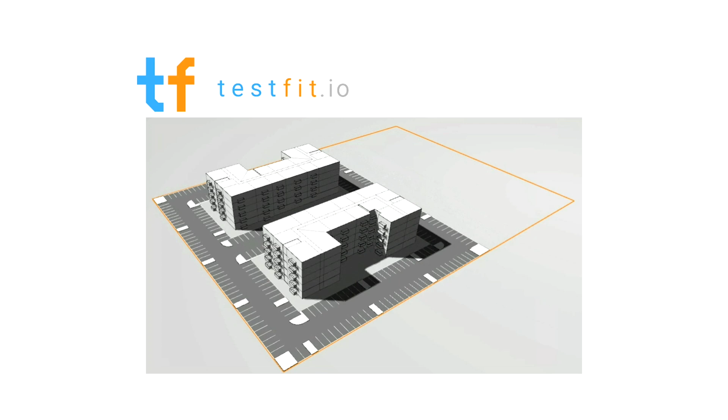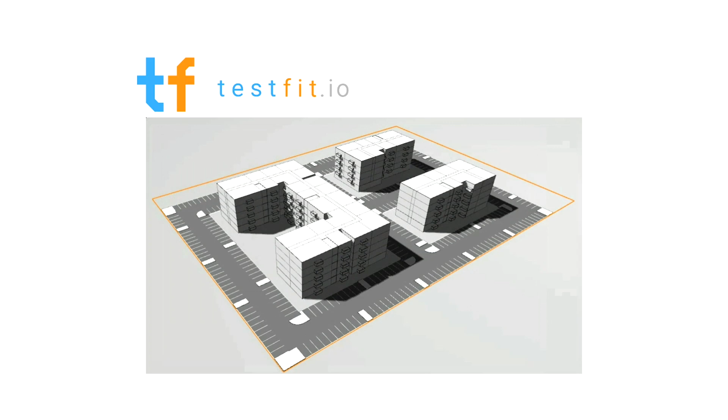Let's say you have a site and you want to say, hey, I want to have 235 units on that site, and it's a multifamily unit, and I want to go through different configurations and figure out how much will fit on the site, based upon the parametrics design. So what this does is allows you to parametrically test fit a site to see what you can fit on that site in these different options.

Normally a designer would do this and submit those to a developer. Now a developer can do this, or a designer can use this tool to do the test fit.

Tim is going to run a short video here, and he recommended that I don't use the audio, but I like the audio. So let's see if we can hear it, if this comes on. It may or may not be working. Well, certainly I think he muted the audio.

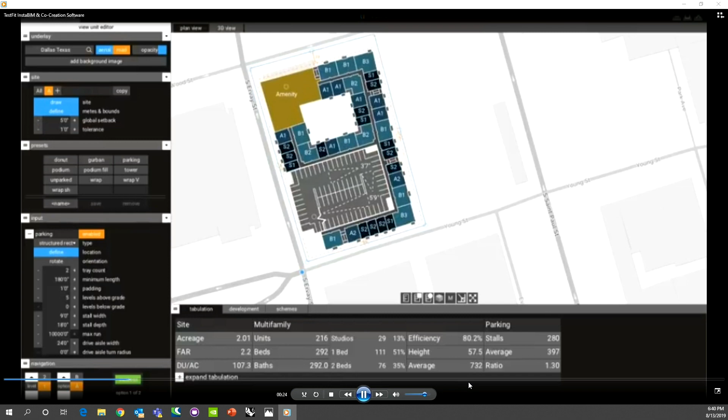It's very hard to see what's going on here, but if you go to the website and take a look at what's happening, there's parameters on the side, and then there's feedback down here on what it's measuring. It actually gives you quantity counts for how much space is inside each one of the buildings, so that you can estimate how much this is going to cost and whether your schemes are going to work or not.

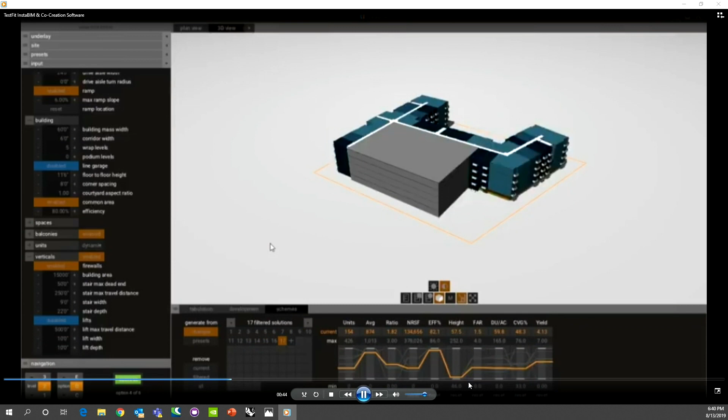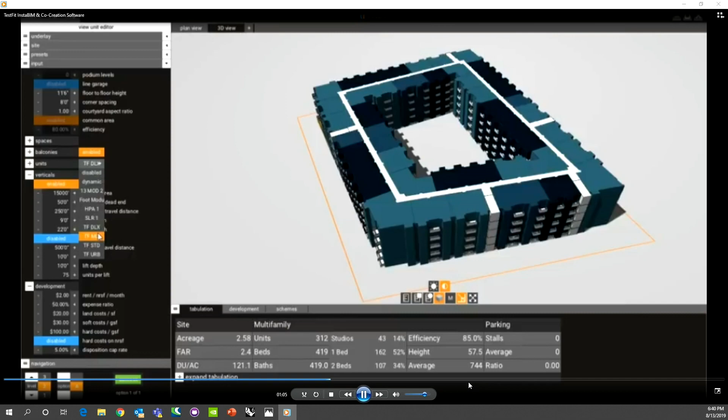This is real time, not sped up. This is kind of how it works when you go use the site. If anybody is dealing with developers that are trying to test fit sites, this is a way to do it. This is moving really fast. The audio would tell you what is going on here, but the audio is not working right now.

I just want you all to know that if you want to see a Forge application, go to TestFit.io, go to their website. You can schedule a demo or look at what they're doing here. And this is for real.

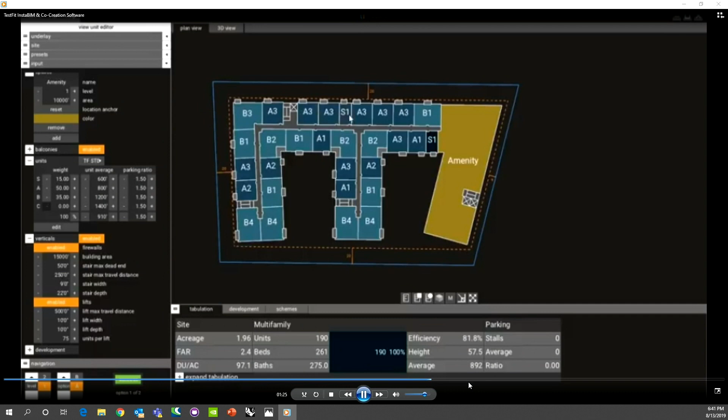This is generative design, because it generates many, many different options for you. It'll generate 1,000 options if you want, but nobody wants to go through 1,000 options. You only want the top 3, and this is what this allows you to do, is get down to the top 3 really, really quickly.

And guess what? At the end, once you're done dealing in this Forge environment of test fitting your building, then you can output this to AutoCAD, to Revit, to SketchUp, or whatever program you want.

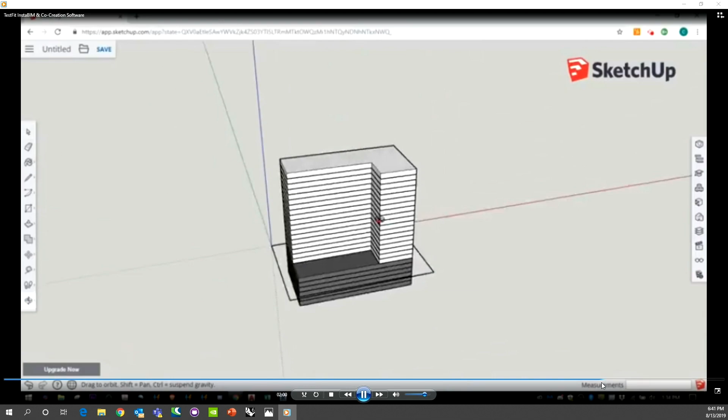The second big takeaway that I had from the conference was there was a presentation done by Turner Construction. A guy named Derek Zero and a bunch of his teammates put together a presentation where they were showing how they were using virtual reality, and they posed a couple scenarios.

What they did was they took the building model, they modeled it up, but they didn't model it down to a specific level of detail. They modeled the level of detail about how the people installing it in the field would want to see it. So they stripped out all the stuff and made it very visual, so that people, before they ever went on site, before they ever started the project, could walk through it.

They actually did this, put these glasses on. These are people that were installers and mechanics that were really interested in what was in the virtual reality of the site.

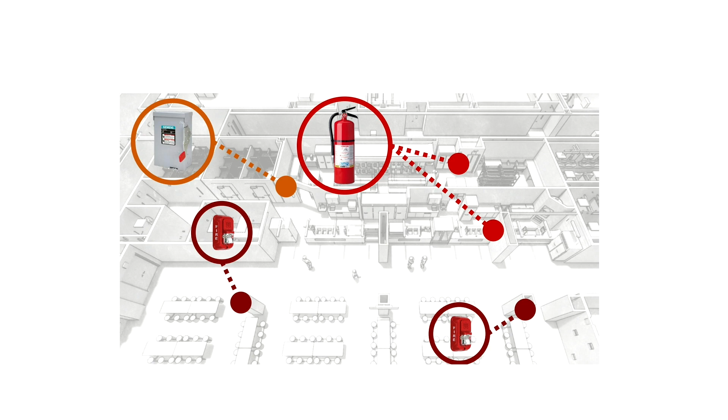More so, what they did was they took this to the permitting authorities. They said, hey, the building's not built yet, but can you, the plumbing inspector or the electrical inspector, please walk through the model with us so that we make sure we get it right before we ever start building, collapsing the time before the building gets its certificate of occupancy.

I don't have great images here because I tried to download them and they didn't turn out well, but it was a very good use of virtual reality to help speed up the project. So anyway, that's a little bit about CAD Microsystems and our user groups and what happened at BILT.

And Timon, why don't you take it from here?

Thank you, Jeff. All right, so Jeff already stole one of my big thunder shots, and that was the TestFit.io thing. But one of the things I wanted to say is I'd seen generative design before at conferences, more as a buzzword, more as things that were happening, going to happen in the future.

Now, it's not here today to take over everything, but I will say that it's part of what I'm calling augmented design. I think we currently live in an era, a coming era of augmented design where we are using virtual reality, where we're using generative design to help us assist. And those of us that will adapt to this augmented design, where the machine is doing some of the design and the human is doing other parts, are really going to be able to take advantage of things.

So I'm going to talk about 4 different areas of the conference. First, I'll talk a little bit about the hackathon and what that is. I'll talk about owners' expectations, really short. We'll talk about working with data, and then machine learning. I'm going to skip the part about generative design.

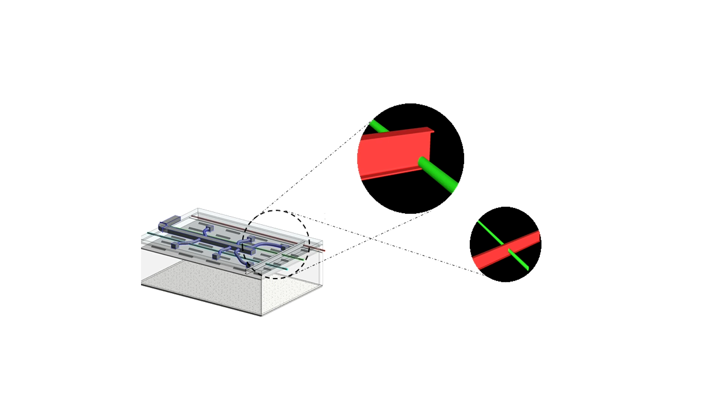What do you do with a clash after Navisworks has already been run and you want to process the clash further? And our result out of the hackathon together, again, these are kind of 2 project manager people and 3 people who did the coding, all working together to come up with this in 2 days, was we created a web application.

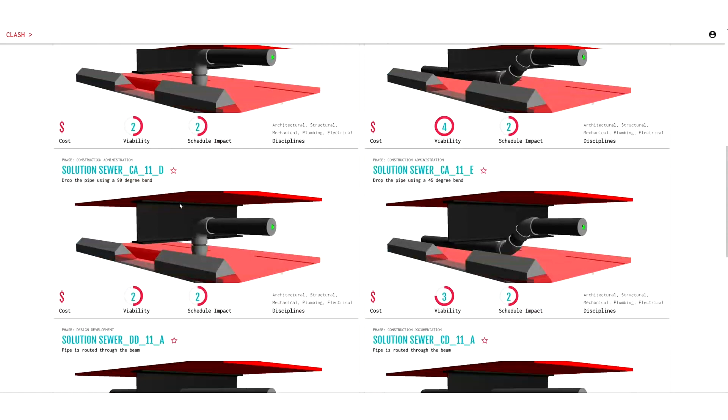Again, this is just kind of a prototype, so it's not really released out completely, but a web application where the people who are going to make the decision about who's going to solve this clash, they can decide the clash, they can pick the solution. So they might say, for example, it's most expensive to cut through the beam.

Surprise, surprise. It's less expensive to reroute the plumbing. But maybe at a different phase, it might be different, or maybe if it's a different type of duct or something, then routing it through the beam might be more helpful.

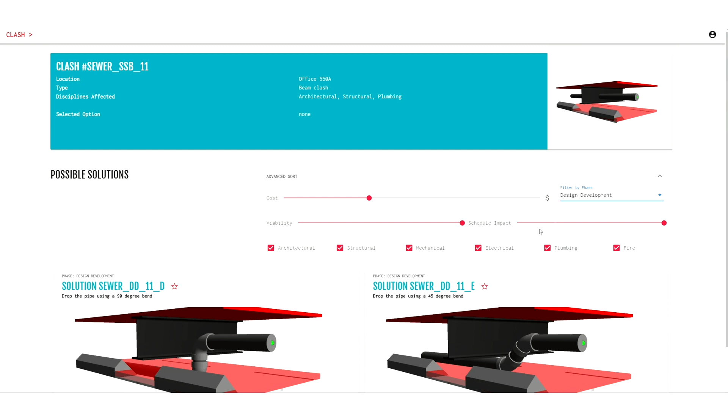So during the clash detection or post-clash detection conversation, they would select the optimal solution in the web app, because they're not usually going to be working in Revit. And then back home, the people who are receiving the data, so for example, an MEP consultant would just receive the clashes that had been decided are going to be solved by MEP. The structural engineer would only receive the clashes that were decided would be solved by the structural engineer.

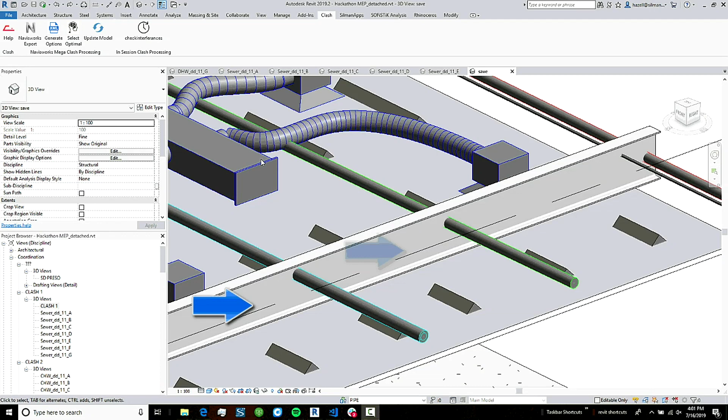And then we kind of put together an update model, and it would update the model in the way that the clash was decided by the project managers were going to be solved. So kind of a prototype, but what I learned through this exercise was that this idea of augmented design, or we actually use some generative design ideas about how to route the pipes, it's really here, and there are real applications that can be applied.

So going on from the hackathon, I went to a few presentations from owners. One was during Data Day, and one was during the main presentation. And both of them really said, we want data. We want good data, but they wanted it in different ways. So the one presentation was by Alberta Infrastructure, the entity that runs all of the government infrastructure inside Alberta, Canada.

And they have a great BIM deliverables document. Highly recommend writing it down right now, going and checking out Alberta's BIM deliverables document, because they went 4 years ago from having one line, do BIM, to actually having, I think they have 20 pages of what they expect when you're doing BIM on their projects.

I might have some recommendations for them for how they can adjust it, and they're working on it, but that was really interesting. And they said, you know, if I give my operations guys a model, they are like, what am I supposed to do with it? But if I give them a COBie document, they're like, oh, that's amazing. That has all the information I need, and they wanted a spreadsheet.

So it was interesting to hear them say that. There was another group, Willow, that is currently working on digital twins. Digital twins is this idea that there's a virtual representation of something real, and in this case, a virtual representation of the building.

They were using BIM 360, so for those of us working in BIM 360, they were pulling your models directly out of there, then putting usage data on top of that, so the owner could review the models, their buildings, and connect all of their buildings together in one model. It was really interesting to see the two different ways owners are looking at it.

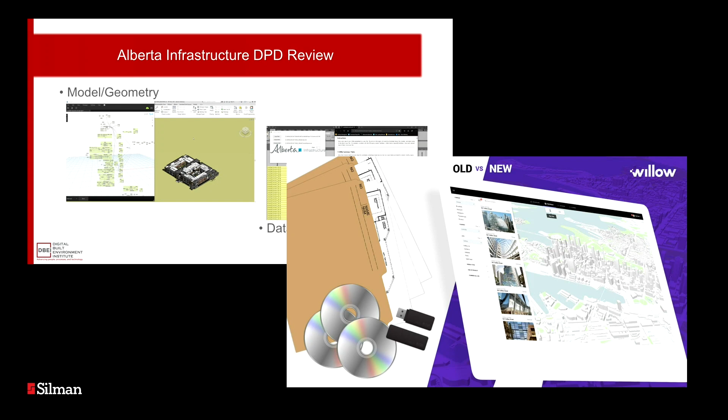But at the core of it, they're looking for data. Really, our models are data. They have a geometric representation, but really, that's what they are. Heard a lot about data extraction.

Everyone's using dashboards, dashboards for this, dashboards for that. You don't have to go and create your own dashboards, there are a lot of entities out there. But when we're working with so much data, we have to create a human-readable way to look at that.

I think Richard has an example of that, where he's looking at journal files, which are huge in mass, but he has a visual way for a human to understand what they're looking at. Same here with model health, whether it's the BIM maturity of a project or a project team, all kinds of different things. Geometry and data transfer has been something at these conferences for years.

A few years ago, Flux was a big buzzword. The one I saw at this conference was Speckle. It's interesting - Speckle has the ability to not send the entire model to the rest of the players in the team, but just send some key control points.

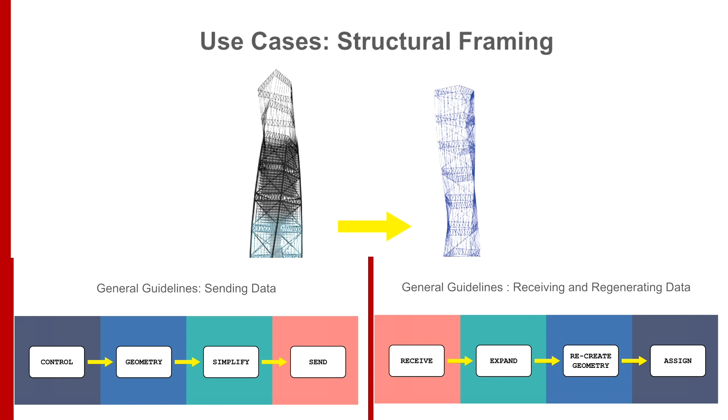For example, if I'm the structural engineer developing the exterior facade, I really may only need the exterior mass of the building. I might not need all the components, but information about some of the structure, some of the floor plates - just key control points that can be exported and downloaded on the other end and processed the way they're going to use it. Not sending a full model, but just the parts that are pertinent to different entities. I thought that was interesting.

It works with all kinds of applications. But wait, Rhino - am I allowed to say Rhino at this user group? Rhino has just redeveloped their entire application to work on top of Revit. So you can now open Rhino on top of Revit, and all of the Grasshopper stuff works on top of Revit. It's in beta, but I believe in the next year or so they'll release the next version.

The last part I'm going to talk about is buzzwords or reality. The two words I was picking up on - one we already talked about, generative design, and the second is machine learning. I went into this conference with a very specific view of machine learning, but realized our industry currently is using it in slightly different ways, and there is machine learning happening today.

There were two examples shown to us. How good is my model? For machine learning you need a large data set. There were a lot of presentations with small data sets, like 8 models, 10 models. So it's doable, but your results are going to be kind of iffy if you use a small data set.

So, how good is my model? I might plug in how many groups I have. I might say how many in-place families I have. I might say how big the model is. And then from that information, if I had 30 models like that, and I knew these ones were good...

...and these ones were bad, then when you plugged a new model into it with those same key data points, it could tell you, yeah, it's good, or no, it's bad. You could get more specific into that. But that would be an application.

Or how much does this cost? Sometimes it takes a lot of time for us to figure out costs of our projects. So this group developed a machine learning algorithm that would look at how much curvature the pieces had, how much uniqueness there was in their design, and then would spit out an approximation of cost.

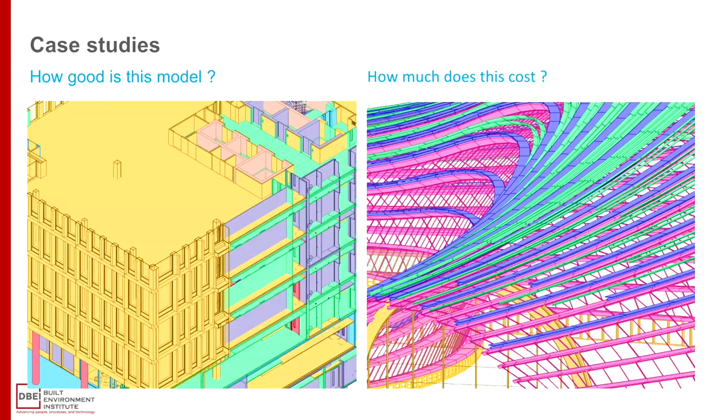So then the designer, when they start putting in these crazy swoops, realizes, oh my goodness, I just tripled my cost with that one swoop. If I remove that one, it might be more feasible and might not get value-engineered out later on.

Other applications are things like clustering. So if you're looking at this facade, or this facade here, and you're trying to figure out, okay, which of these pieces have the most curvature? Now, I'm not telling you here which ones have the most curvature, I'm not telling you which ones are the most square, but it's grouping them based on the features that they put into it.

So kind of like, is this a cat, is this a dog? It's not telling you, yes, these are the expensive ones, these are the cheap ones, but it is kind of telling you there's two groups. And then you could boil down into those two groups to figure out what they are. You could tell it how many groups you had, and it would give you a different layout.

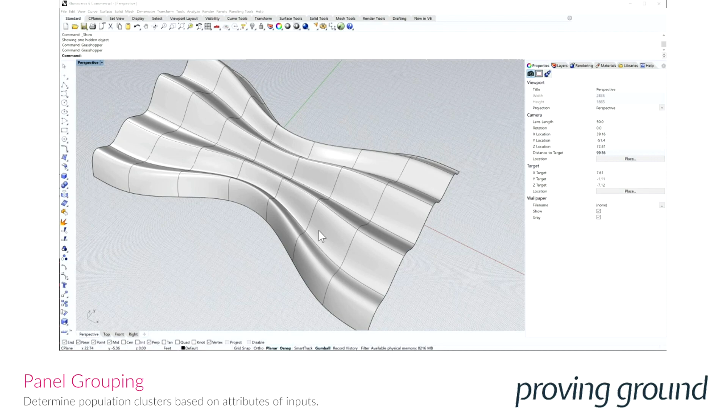Now, how many of us have projects that are 90% swoopy, curvy things? Nah, not so much. So it's like, wait a minute, Timon, you're telling me machine learning has application, but only for these kinds of things? Well, I want to pose that any of us that work on historic buildings work with swoopy facades.

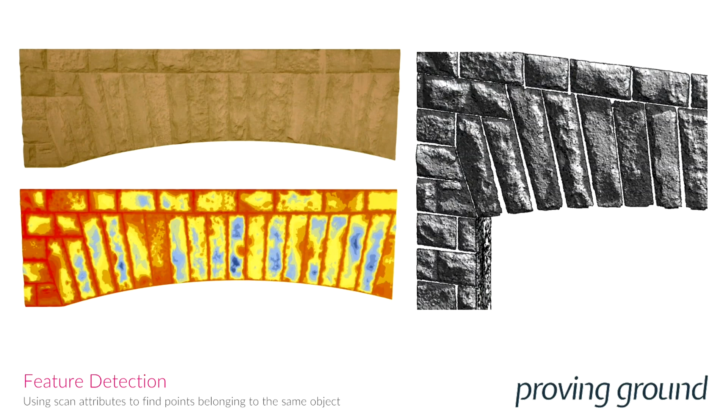That's pretty cool. So with that, I want to show a very, very mini version of another kind of machine learning thing that I learned.

Was it on a moment ago? As soon as I sat down? Anything? Well, there's beautiful squares on the screen. Are we going to get this working? I'm plugged in still.

All right, well, while that pulls up, let's play this one. Oh my goodness, this is going to be... let's see here, I need to change this. Can I do this?

Yes, great. Okay, so... ooh, it's kind of small. So here, do you see? You can't see it, so you're going to have to trust me. If you want to stand up and walk up here, you can see it. But I have these 4 or 5 different types of rooms I've laid out here.

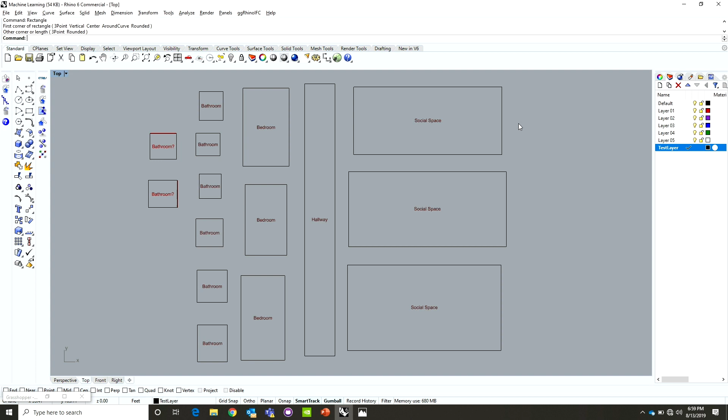And it says bathroom. It's like so much less impressive. Was this zoomed out? Oh, you want me to draw a different one? Wait, are you thinking that I've just programmed it to always say bathroom? Oh, that would be pretty smart.

All right, so let's try a big one here. So I'm going to draw a big one over here, and it says social space.

So there's just a very, very tiny, miniature example of how machine learning could help us if, for example, from our last 80 projects, we were to take every room, take the volume, take the dimensions of the sides, maybe take its level or its location, any other features we think are important to know. Maybe is there a toilet inside of it? That could be helpful for naming. And then let the computer name it based on how you've named that type of space in the last 80 projects. So that would be kind of a miniature applicable application of machine learning.

So with that, I'm going to end and open it up for questions if anyone has any. And I'm not going to try to pull up the question slide. Well, we'll try. But all right, we'll just leave it on this. So any questions? Yes?

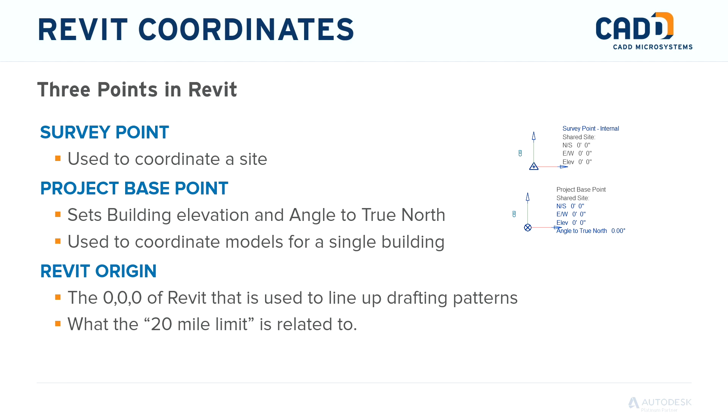The Revit origin is the 0,0,0 point for your graphics in Revit. So the reason why, when you model something really far away from the Revit origin, the graphics start doing weird things is because it's just too far and it can't process it.

So the most important thing is to make sure that whatever you're modeling is near the Revit origin. When you start a Revit model from the out-of-the-box library template, the 3 points are right on top of each other, so that way you know where they are. If you ever lose your Revit origin, not sure where it is, and you've moved your other points - if you link in a CAD file origin to origin, it will put that CAD file at your Revit origin.

So that's how you can find it and know where it is. So the real lesson here is if you ever get a file, like a civil file, and you link it in origin to origin and it shows up way out in space, don't model over there. It's not a good idea, because it's just going to be too far. And it's not even 20 miles.

I actually went down a rabbit hole once trying to figure out where the graphics do weird things. Literally 4 hours later, I still was like, this makes no sense at all. I wrote a blog post about it - you can go find it. But really, the lesson is just don't model all the way out there.

Model close to the Revit origin, because what happens is your drafting patterns start doing weird things. As you zoom in and out, lines will just kind of jump around because it can't process that far away from the Revit origin. And it's really only like a mile or two - it's not even 20, just based off of my own personal testing.

So all of that's there. Initially, when you set up your model, typically the architect owns the points. I typically, in all of the templates that I set up, will actually place 3 reference planes to mark the X, Y, and Z of the Revit origin.

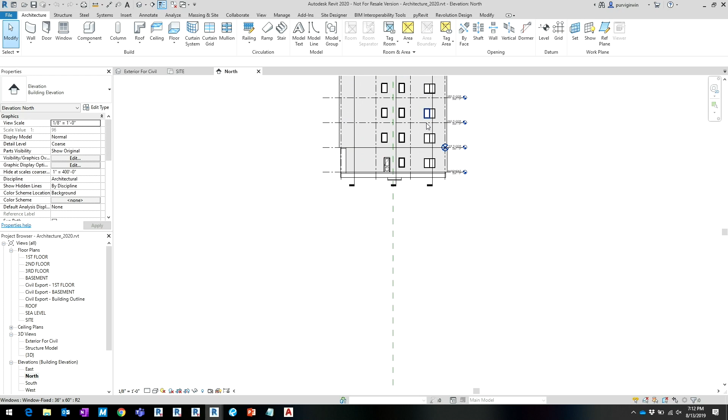Okay, so here I have a file, this is a little building. If I go here to my north elevation, you're going to see that my first floor is set here at 340 feet. What I'm showing here is that you're going to take a point on your building that you've gotten from your civil engineer, who has located the building relative to where it is on the planet.

Because that's always the issue that we have - in Revit, the world moves around our building. It's not really located where it is in the world, whereas civil engineers locate the building where it is on the planet, which is how it should be really. So what we're going to do is take a coordinate point given to us by our civil engineer of a specific point of our building, and use that to orient our building.

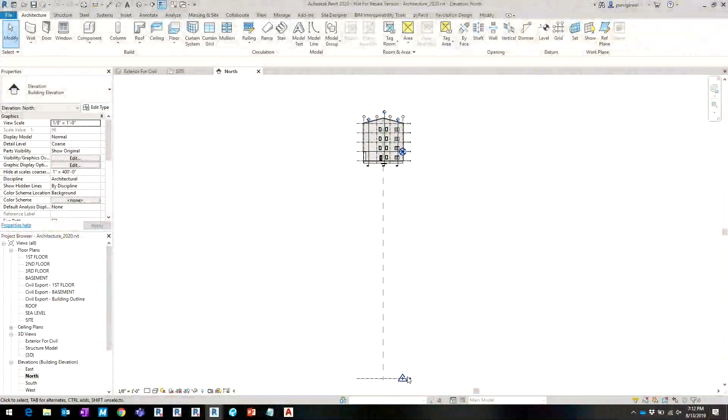So in order to help us do that, our building is up here, and I have a sea level elevation marked as my 0,0. We need this 0 level for topography, right? We know that topo always comes in relative to the 0 of your building. So part of this is going to show you how to bring in topo also. So we have this 0 level to be the 0 of our building, and here I have the building located here.

All right, so I'm going to go to my plan, my site plan view. I have a text file. This was given to me by my civil engineer, giving me the northing and easting for my building, along with the elevation that my project base point is going to be set at, and then my angle to true north. So I'm going to take these values and put them into Revit.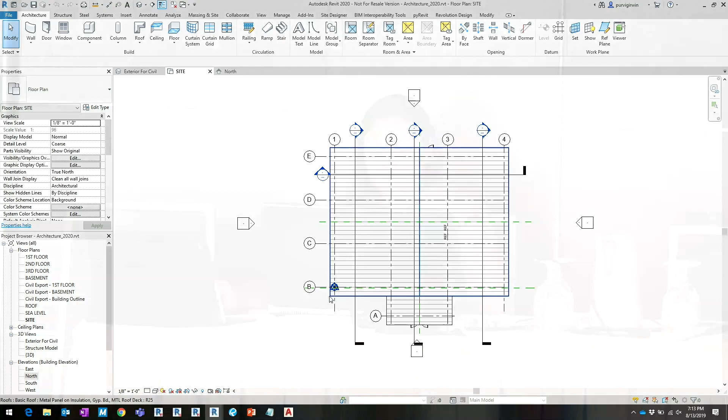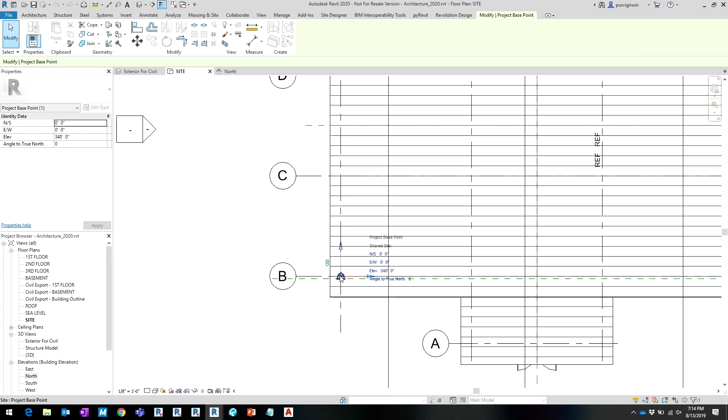So I'm going to copy this. Now something important to note is here I have my project base point and my survey point, and they're on top of each other. My survey point is set at 0,0,0. My project base point is set to 0,0, with an elevation of 340. This was to mimic a real world example where the architect may have already given the building an elevation, and now the civil engineer says, actually it's a little different, so now we're going to update that.

And this is a different workflow than anything I've used in the past, partly because being able to get this information is relatively new, so it's kind of an update to the workflow we've used before. So I'm going to go here to my Manage tab, go to Coordinates, and use the Specify Coordinates at Point.

Has anyone ever used this? A couple of people? All right, if I'm doing something wrong, you can tell me.

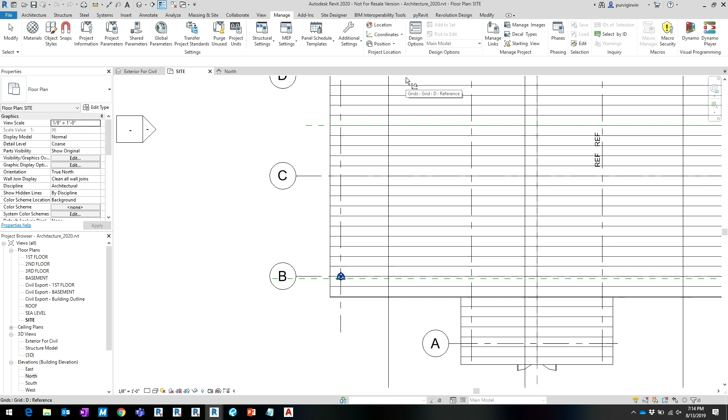Specify at point. All right, I picked it. I'm going to choose this point right here, and it gives me this window with those points. Okay, so I have that north-south one. I pasted that there. Go back here, copy that one, paste this one here. This is 344, and this is 249.

Now something interesting you'll notice here. I type in this 249, and then I click away. It changes it to 111, and it actually changes this to west. You actually have to go back here and change it to east. We're not sure why - it's not documented anywhere that we know of. Do you know why?

So I have the survey point unclipped right now, yes, I have it unclipped. So it's going to move with it. So I put that in, now. So when you type in the angle, it's going to switch to west, and you have to just switch it to east, otherwise it will rotate the wrong way. It's just a weird thing we figured out as we were putting this together.

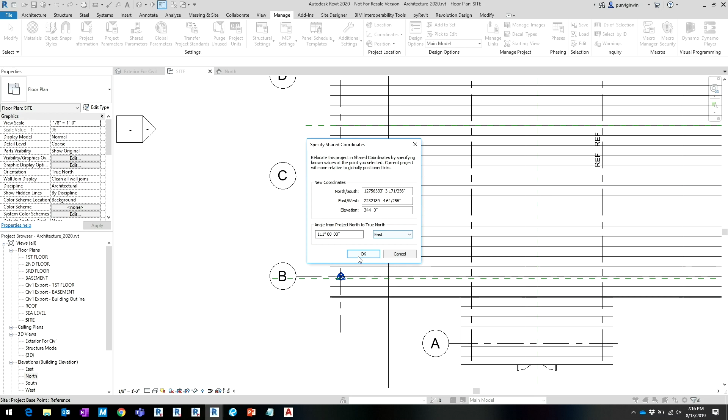There you go. Yeah, Nick figured this out, and he said he couldn't find it documented anywhere that you need to do that - just from testing it, he figured this out. So now I say OK, and it rotates my building. Cool. Okay, so now I've got my building.

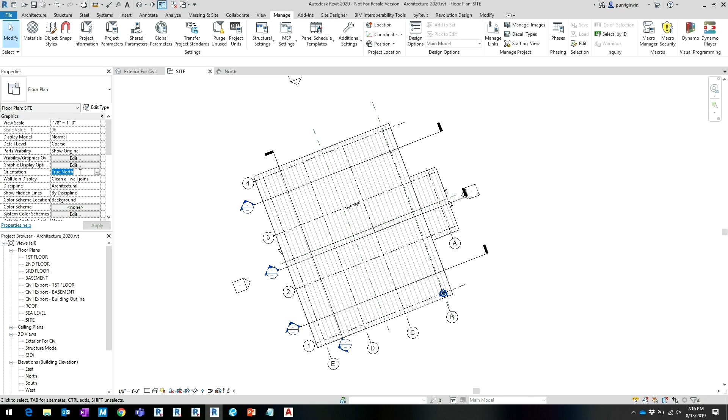It's actually set properly. One thing I forgot to note, my view is set to true north. You want to make sure that when you do this, your view is actually set to true north, because that's what you're doing - rotating the true north. So if I go here and change it to project north, I'm going to see that it rotates back to the way it was.

Okay, pretty cool. Now, we haven't yet figured out a way to consistently push this back to the links. So the recommendation I'm giving you right now, which may change, is to have all of your consultants do the same thing - specify the same coordinate, give them this coordinate, tell them to specify this at this point. Once they do that and you link them back in, they'll all be in the same spot.

The one other thing you'll have to do before you send it out, because we changed the elevation of the building, is go here to elevation - this actually got moved up 4 feet, the sea level. So we're going to change this back to 0, and change our survey point back to 0, and then clip it. Now our survey point elevation is at 0, and our sea level is at 0.

Okay, cool. How often would you say you get those points from your civil consultant? I would ask those out there, because I don't know. Did you have a question?

Yeah, I've been trying to make that work, and it wouldn't actually do it, because here's the issue. Typically, I've given my model to my consultants, they link it in, they acquire the coordinates from my model, and then they start working. So when you try to reacquire them, it tells you that it's already acquired, and it doesn't work. The solution would be to unlink it, to remove it and link it back, but that's not usually what we want to do, because a lot of times consultants are dimensioning off of the links.

Or somehow their objects are referenced to the links, so removing it and putting it back isn't always the best solution. I tried that too, and it didn't work. So it's still in testing - this is still in testing workflow in terms of using it in real life and not setting it up perfectly from the beginning. That's why I'm saying take all of this with a grain of salt, and the fact that coordinates are just confusing in general.

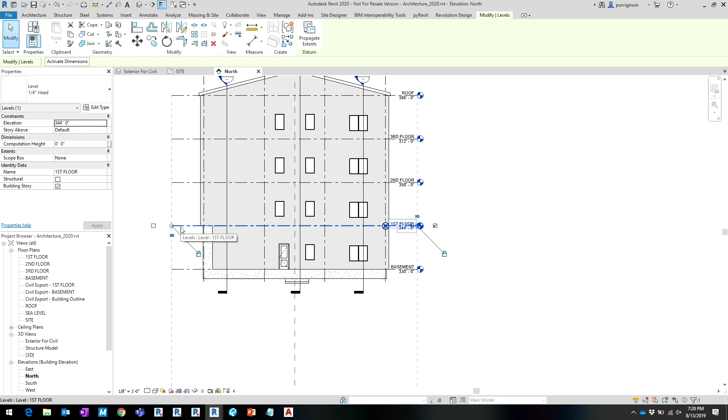You mean you wouldn't want to change, like move your whole building up that way - that would, like moving your model elements, that would be a nightmare. Yeah, no, I wouldn't move it. So really what you're doing is a similar thing to the relocate project tool, where we're keeping the building where it is and moving the world around it. That's how Revit works.

That's why all of your annotation doesn't get messed up when you use the relocate project tool or when you use this, because it's literally like moving the world around your building. Does that make sense? So all your sheets don't get messed up. I don't know what happened over there.

So when you did specify coordinates at the point, what did you select after you? I selected right on top of, it ends up selecting where the project base point essentially is. So you didn't specifically select the project base point? I'm just wondering what elevation, since you're picking a point. When you pick the point, it picks the project base point - like I picked it on top of the project base point, so that's what it picked, was the elevation of the project base point.

Do you have a question in the back? Yes, but if you have linked an architectural into, say, an MEP model, and you have copy monitored the levels, if the architect changes the levels, wouldn't you just do a coordination review and it would correct it? Change the levels? Yeah, you said you're moving your level, building up - wouldn't just doing a coordination review fix your model? I'm actually not sure if doing just a coordination review and then accepting the changes would actually fix it or not. That's a good question.

That's not something that I've tested with it.

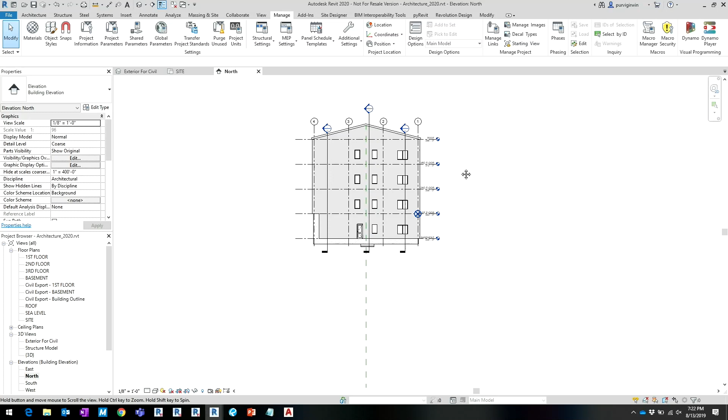I want to show you now that we've used that point to specify where the architecture model should be, we can actually link in the Civil 3D file. I'm going to go to Insert and Link CAD, and this is the site file. I'm going to uncheck the correct lines that are slightly off axis, just because it's a big site file and I don't want it to mess up my information. I'm choosing by shared coordinates, and orient to the view.

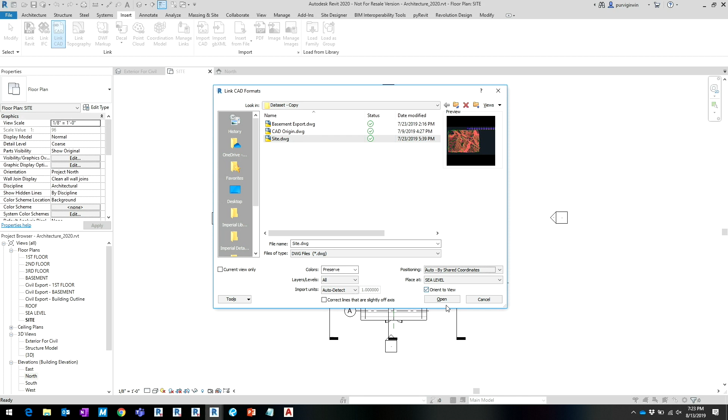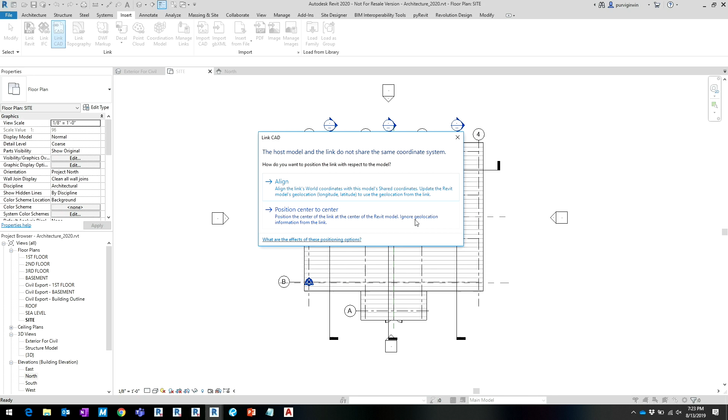This is a really big file, so you're going to get that typical 'it's too big' warning, and some ActiveX stuff. This is the interesting thing that happens: it tells you that your model and your CAD link don't have the same coordinate system, so what do you want to do? Usually it just tells you it can't do it, but here you actually have this option to align it. If you hit this align tool, it puts it in the right spot.

Pretty cool. For some reason, when I try to link the CAD file in and it's set to True North, it doesn't show up. So I set it to Project North and do it, then I can set it back to True North if I want. I'm not quite sure why.

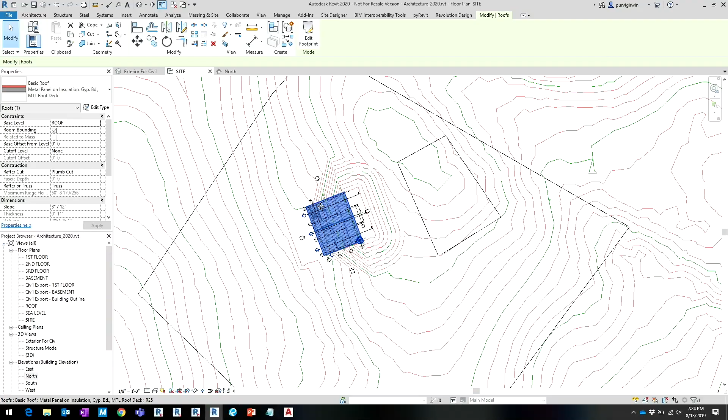That's because I used the point that the civil engineer gave me at this point of the building, and I put that same point there, so they're coordinated together.

The interesting thing is, my coworker, when he did this at Baltimore, there was a panel of other AEC professionals, and one of them was a civil engineer. The civil engineer actually said, I can give you this point, it's not hard at all, we can coordinate this. It wasn't the architect saying the civil engineer can do this—it was the civil engineer saying, yes, I can give you this point. If we coordinate this point, I can give that to you, and then we can make our models coordinated.

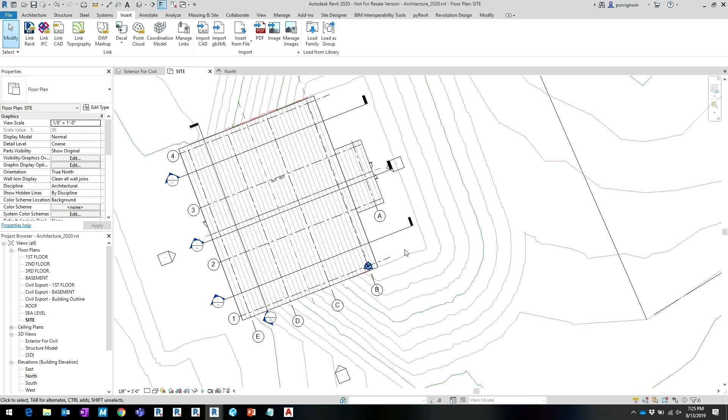Now, before we move on, I want to show you that I did not move my Revit origin, and I'm going to show you how I know that. I'm going to link in a CAD file—I have a little CAD origin file I've used in previous presentations. I'll make sure to link it in origin to origin, then place it at sea level, that's fine. I'll go ahead and say open.

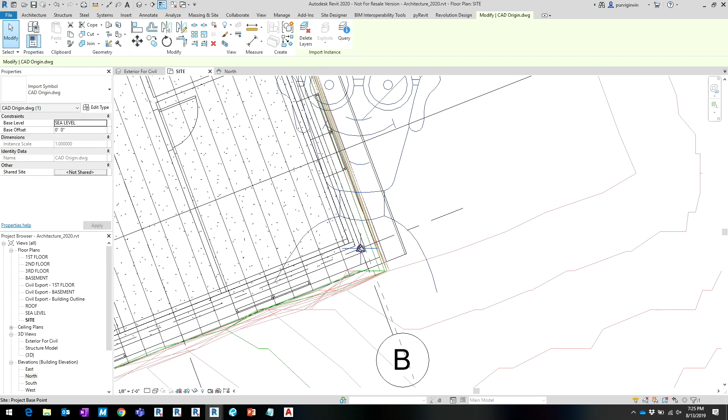Let me do this so you can see a little better. It's my little Waldo, and I brought it in right at the origin. So you can see that the Revit origin did not move, even though if I click on the project base point, it has these values that I put in that I got from the civil engineer. So I'm good—I can model around here, it's not going to mess up any of my graphics. I'm still at my Revit origin, which is the important thing.

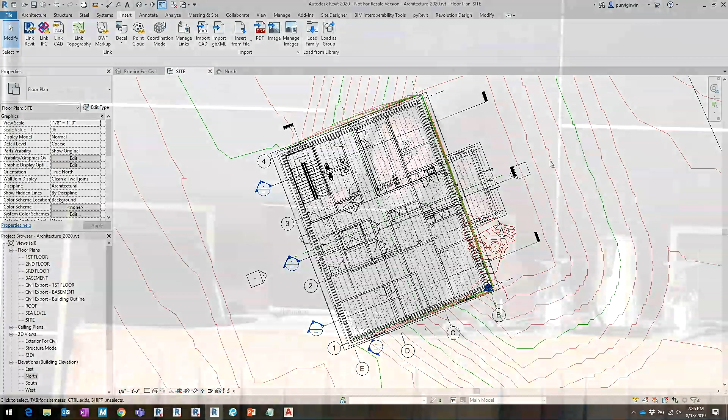Okay, the last thing, two really quick things. I have like 4 minutes left. I am going to put this back.

So the next thing—this is the other thing your civil engineer can give you. If you want more accurate topo, you can get a land XML file from your civil engineer. The civil engineer at the other presentation said, yes, I can give this to you, it's a very easy export for me from Civil. You have to have the Site Designer plugin, otherwise this isn't very good, but it has this one little tool.

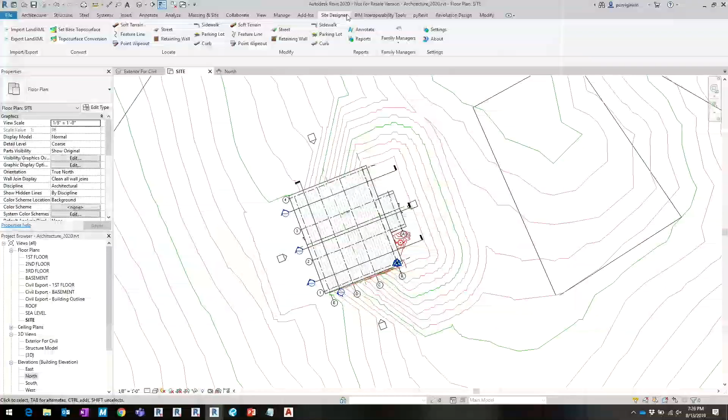So it's free, you can get it, I would use it. There's this button, import land XML. My civil engineer has given me that land XML file. I'm going to hit import.

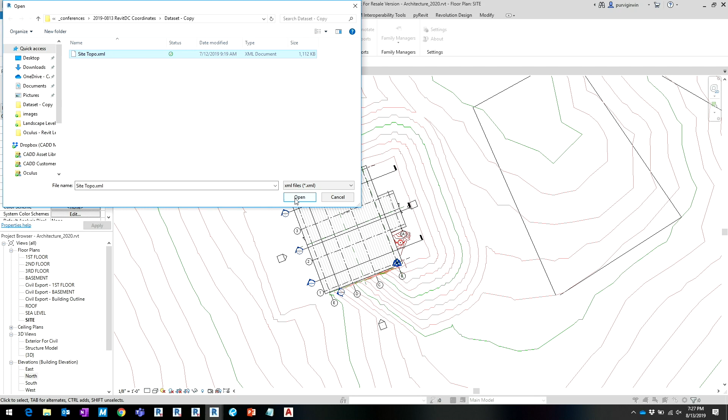I'm going to choose where I want to get it from. I have this topo file. I say open. Now remember, the civil engineer gave me this, so it has the same coordinate system as my file now and as his CAD file does. So I can say open. I'm going to choose to enter it in by survey point. I'm going to say OK.

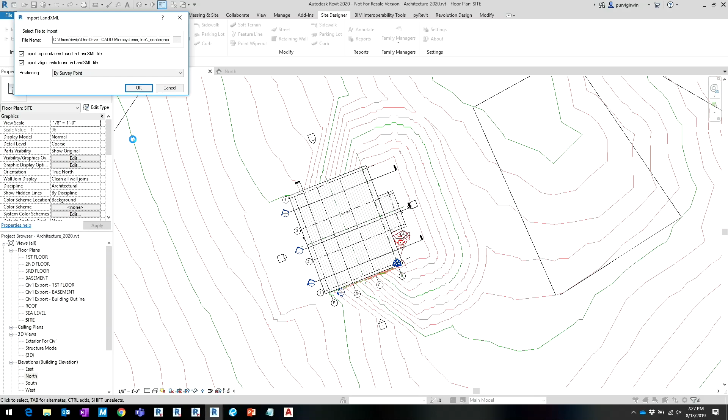It's going to give, there's like one, you can have multiple topo surfaces inside of a land XML file. There's just one in here, so I say OK. I can choose what phase I want it to be on, and I can give it a name if I want to. If I have a topo already, I can choose to overwrite it. Say OK. It says it has no alignments. It's fine, it works. Done. And I have a topo.

Now you'll notice that the lines of the topo are slightly off from the line of the CAD file. That's because the topo is an actual surface. It's a TIN from the civil file. So if I go and look at it in 3D, I have something else linked in here that makes it go out into space.

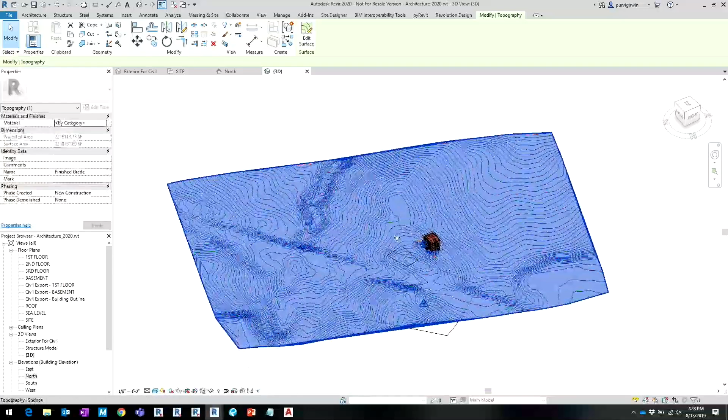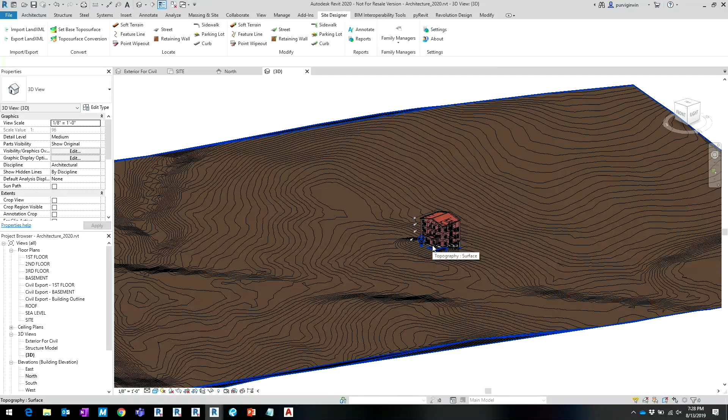And that was how easy it was to make my topo surface. Like literally, I just made it from that land XML file. So I can get it directly from my civil engineer. It's a real civil surface. It's not me extrapolating it in Revit. Okay, and then here's the other cool thing.

You can actually take your model and you can export it out and insert it into Navisworks. You link it into Navisworks. And you can't bring a Revit file into AutoCAD, but you can bring a Navisworks file into AutoCAD. So you can take your model and give it back to your civil engineer, and they can put it into their model using a Navisworks file.

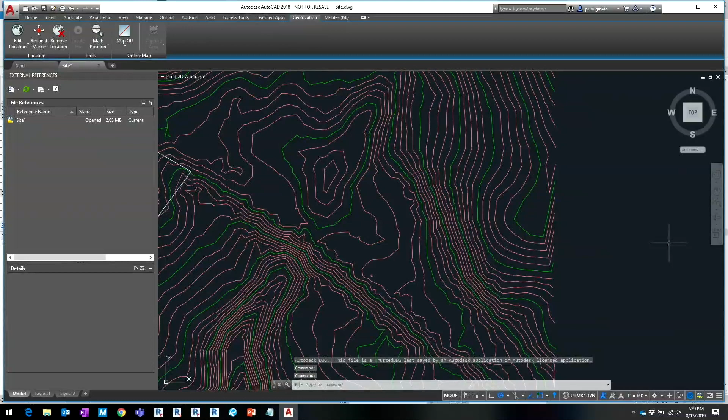So to show you that, here I have that same site file that my civil engineer, this is the file I brought in, but say this is my civil engineer's file. I can go over here, and I can attach a coordination model. All right, I have this NWC file that was created. I exported my Revit out. I put it into Navisworks. It's all, the shared coordinates are the same.

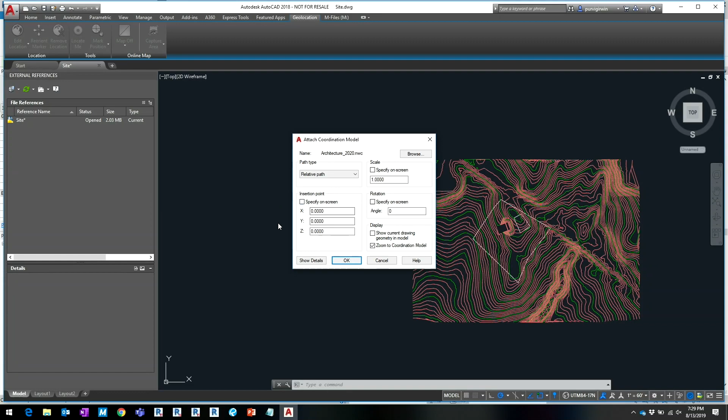I'm going to go ahead and say open. I'm going to make sure that I'm not specifying on the screen. I'm letting it do it on its own. And there's my building right there. And my building is in my CAD file too. Right, so it can go back. So you can now give your civil engineer your building.

Pretty cool, right? And I think that's all I have. So.

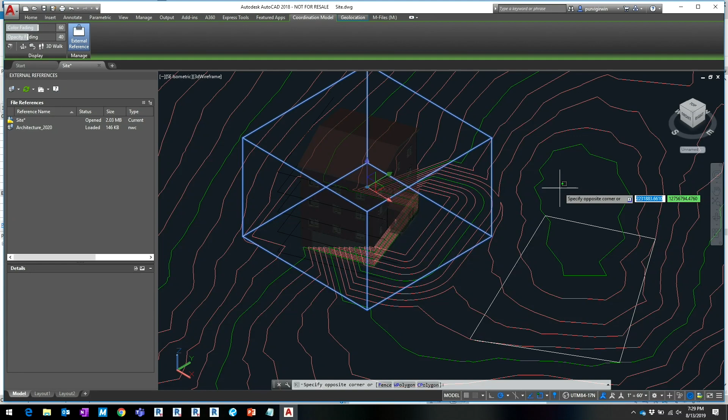Cool. Any last questions? I don't know. I think I have no minutes. It's 7:30. Richard's turn. One last question? Anybody else? Any questions? I'll just say I've used the process quite a bit.

And sometimes when I have issues bringing the CAD files into Revit, if you change the import units from auto detect to meters or feet, whatever the CAD file is in, it'll work better. It didn't elsewhere, I don't know why, but that's just one trick I've used. Oh, good, well that's good to know. So everybody, if you have any issues, make sure you specify the units. Should work better. Cool.

For the bringing the CAD into Revit, you said? Yeah.

Okay, thank you Purvi. And now we're going to hear from Richard, and this is, I think he's gonna embarrass me here in a second. But Richard gave this presentation at BILT Conference, and I sat in on the presentation thinking that, oh boy, I'm going to be about 5 minutes in this thing and running out the back door. But actually, when I saw the presentation, it was really interesting. I really thought that, this is something that in your days of using models and using Revit, you're not going to run across this and know this. And I think Richard came up with a couple different examples about how you'd be using this information or where it is. And so for those of you who have never opened a journal file, you're about to see what's in one, and you're about to see a couple examples about how it can be used. Did you have a comment, Dana?